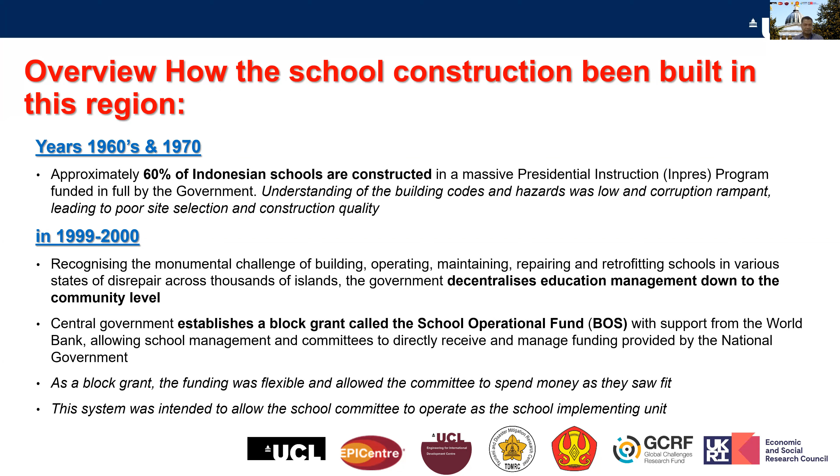Who's the committee? The committee is a group of people who have a connection with the school, like the parents of students and people around the school who can join the committee. As a block grant, the funding was flexible and allowed the committee to spend money as they saw fit. The system was intended to allow the school committee to operate as the school's implementing unit. Okay, next slide.

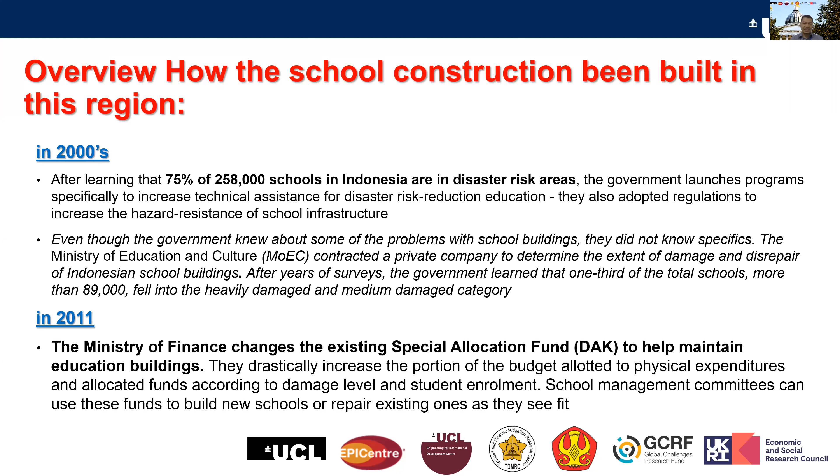In 2011, the Ministry of Finance changed the existing Special Allocation Fund, cited as DAK, to help maintain education buildings. They drastically increased the portion of the budget allotted to physical expenditure and allocated funds according to damage level and student enrollment. School management committees can use this fund to build a school or repair an existing one as they see fit.

How critical thinking of the school construction process in Indonesia from the technical capacity and construction management perspective: for construction, the responsibility is now with the school management committees. They had to hire their own contractors and subcontractors to help them build or retrofit schools, so the contractors and subcontractors are not connected with the government anymore.

But in practice, at the local level, subcontractors are usually proposed by the local government. Committees do receive some assistance from the Ministry of Education's engineers to oversee a project, but they don't always have the capacity to implement the construction project, nor the appropriate knowledge to prioritize school safety. As a result, DAK funds have been spent returning buildings to their original condition, rather than improving structural components to make them safer. That's what happened in Indonesia.

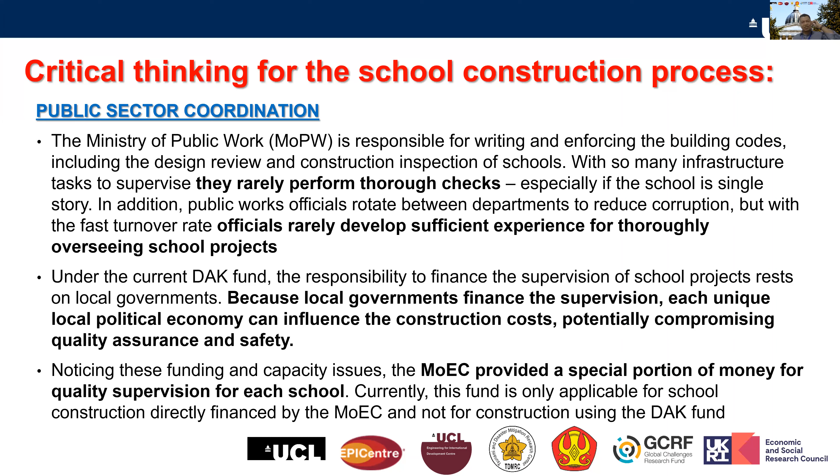Noting these funding and capacity issues, the Ministry of Education provides a special portion of money for quality supervision for each school. Currently, this fund is only applicable for school construction directly financed by the Ministry of Education, and not for construction financed through the DAK fund. That's a bit of a difficulty for the committee as well.

Okay, next. The last thing I want to critically examine is construction speed. Yeah, this is a big problem.

To compound this challenge, the speed at which school management committees must spend DAK funds has pressured school committees to implement projects faster than they are capable of. Usually they just have a limited time to build the school and use all of the budget. Even if the time is just 2 or 3 months, they have to spend the budget.

Other departments rely on DAK funds for education material, so schools need to finish their work within just a 3-month funding window so that funding for other sectors will not be delayed. It's very strict; if they take more than 3 months, the rest of the budget goes back to the government. That's the problem: they have to finish and construct the building very fast, without much concern about quality or structural safety.

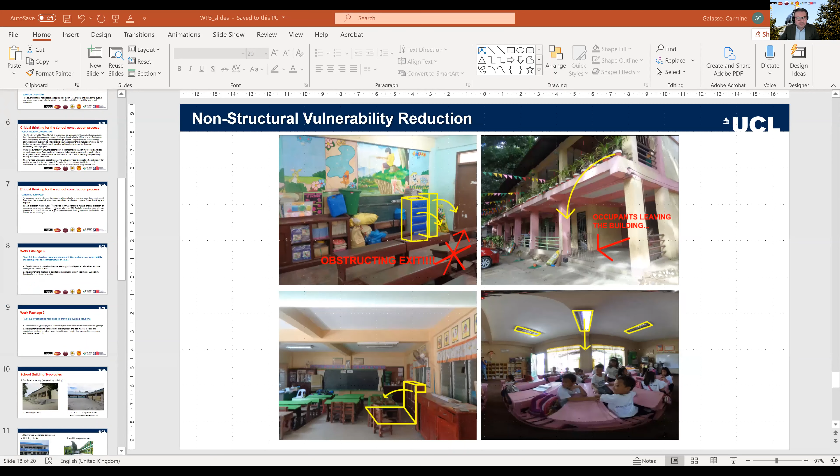Dr. Yunita. Maybe Yunita, I'll share the slides and remove the slides for you. Thank you. Sorry, there's a technical problem.

Thank you, Dr. Sukiman and Dr. Carmine Galasso, for giving me time for a brief explanation about work package 3. There are mainly two tasks: investigating exposure characteristics and physical vulnerability modeling of school infrastructure in Palu, or Central Sulawesi, and then investigating resilience and improving physical solutions, involving assessment of typical vulnerability and vulnerability reduction measures for each structure.

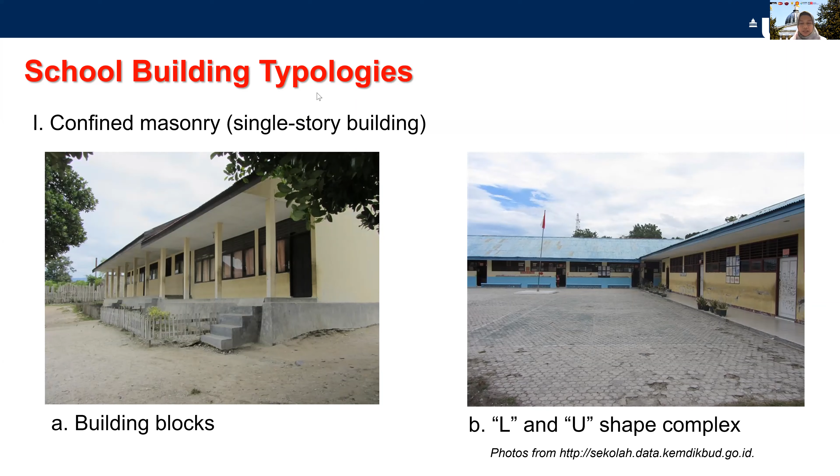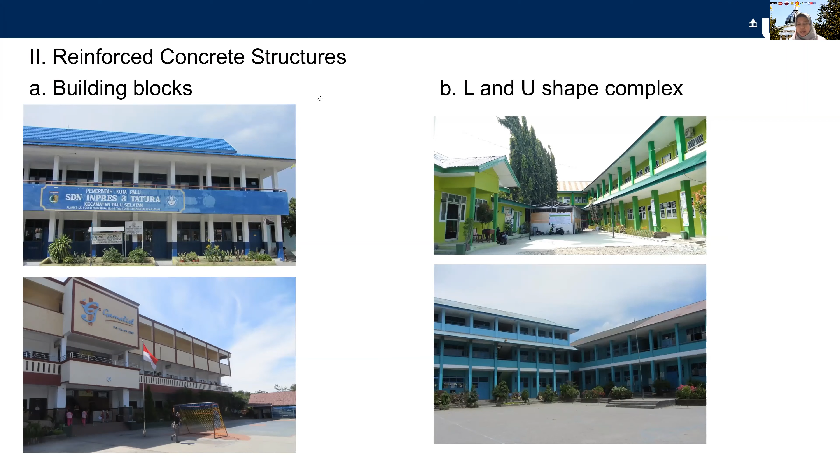To start, we developed the school typology and damage data from the preliminary survey done by TDMRC and EPICentre in 2018. We found two main typologies for school buildings: confined masonry for single-story buildings, and reinforced concrete structures for school buildings with more than a single story.

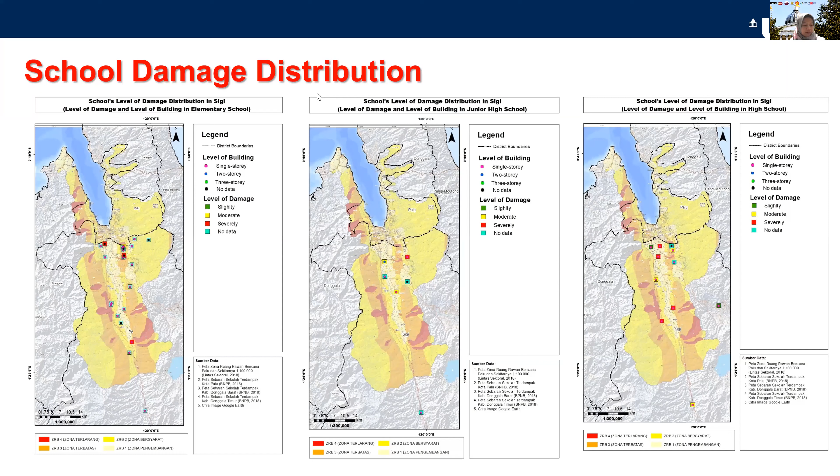We also developed a school distribution map, and we developed the school typology and damage distribution. For every location, we have three different maps for school damage distribution: elementary school, junior high school, and senior high school. The map of school damage includes information on the building's number of stories and the level of damage.

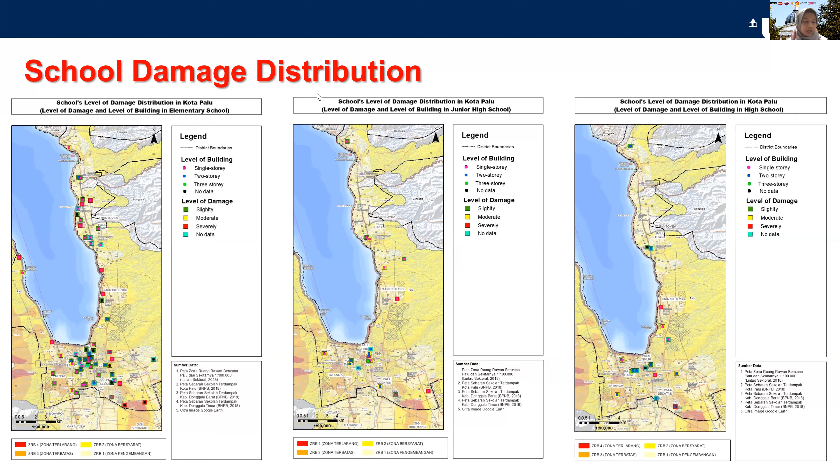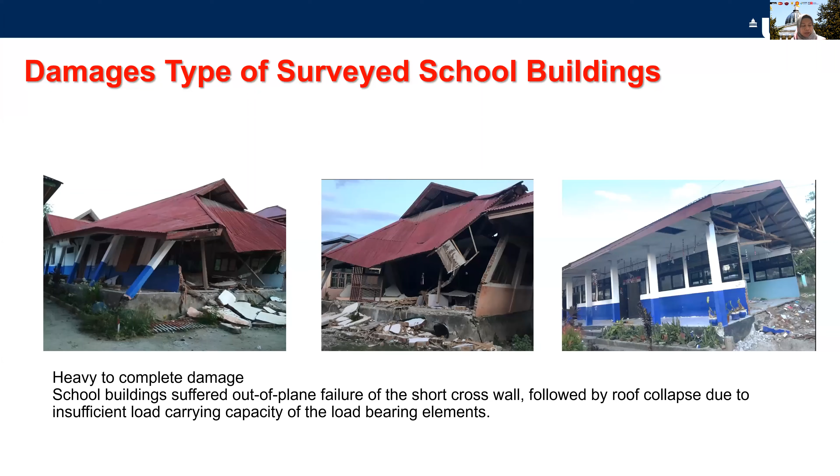Most of the data was taken from BNPB and from the preliminary survey. We also identified the typical damage of each type of construction, which can be concluded as out-of-plane failure of confined masonry structures causing decreasing capacity of the wall to carry load, followed by roof collapse, and also in-plane failure causing cracks going through the spandrel and tied columns.

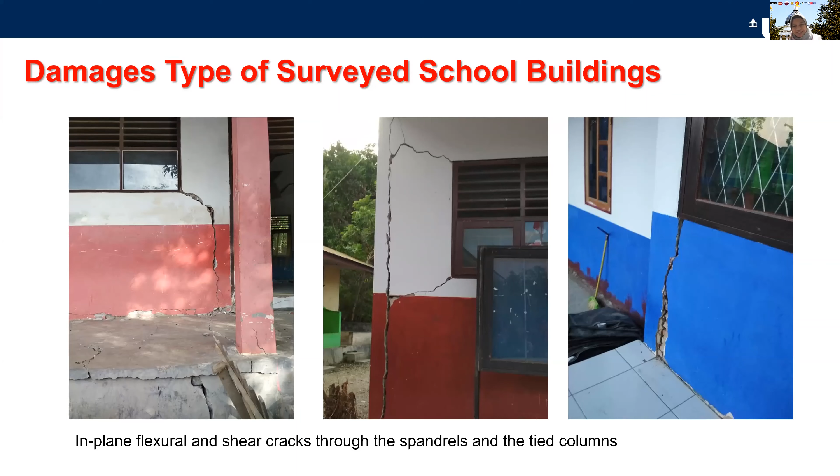However, the data is insufficient to characterize the damage that could happen in a multi-hazard scenario, so further analysis and investigation is really important. That's why we include that in the activities of work package 3. Further explanation of the aim and activities of work package 3 will be presented by Dr. Carmine Galasso.

Thanks a lot, Yunita. As Yunita just said, empirical data are not enough to build reliable vulnerability models for school buildings in Palu. So what we plan to do, together with Yunita, Tiziana, and our collaborators, is develop a multi-level framework, successfully built on a previous project with TDMRC and Inspire, funded by the British Council. The idea is to start with a rapid visual survey through a mobile app we developed within the previous project, together with local partners in Indonesia.

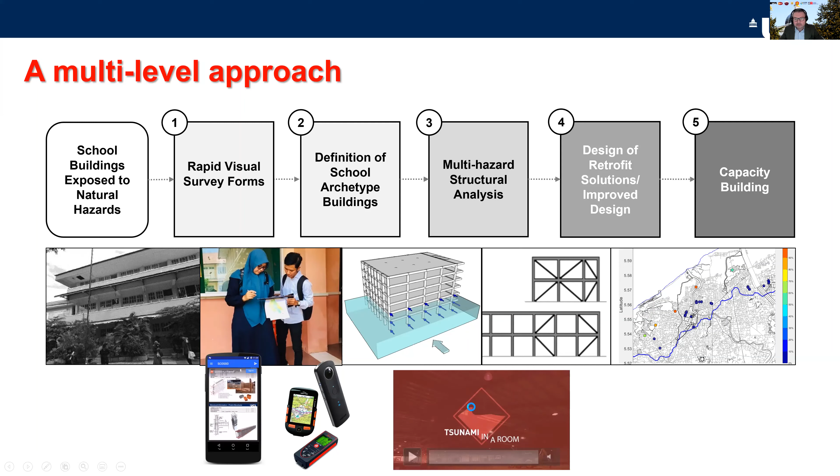Based on the results from the rapid visual survey, we can define an archetype school building for which we conduct advanced nonlinear analysis for multiple hazards, and based on that, provide recommendations in terms of retrofit of those schools, but also in terms of improved design and build-back-better for future schools. A key component of this work package is capacity building with local partners.

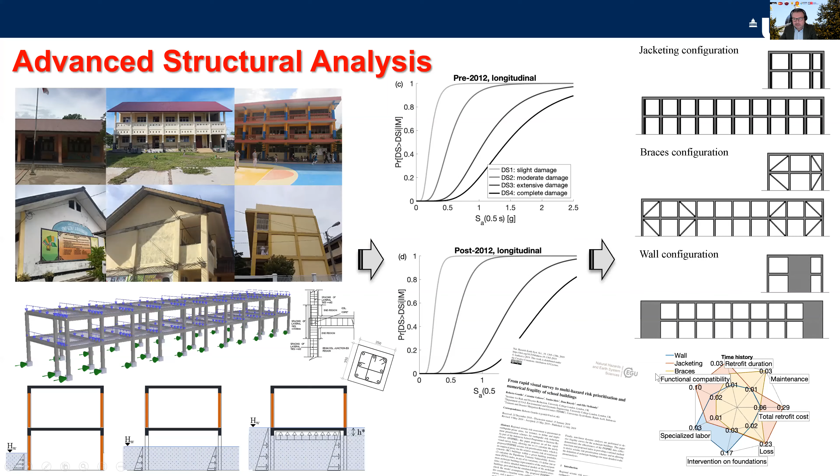We will develop some very advanced numerical tools, some developed at UCL by Tiziana and her collaborators within previous projects, which are state-of-the-art approaches for tsunami modeling and vulnerability modeling of buildings. We'll use fragility and vulnerability type models to recommend different retrofit alternatives, and also use multi-criteria decision making to look at different criteria and identify the best performing alternative.

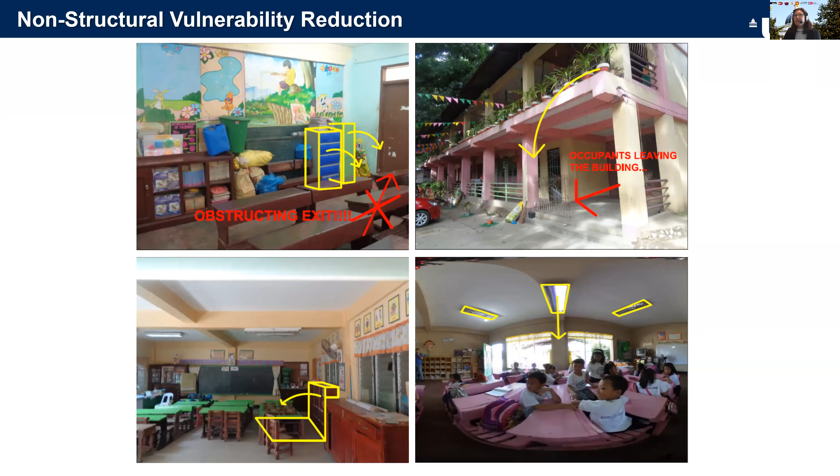Beyond just interventions on physical structures, which can sometimes be expensive, we also know there is significant risk to life from non-structural elements, such as falling objects. So we'll holistically look at these as part of the intervention recommendations we'll be conducting.

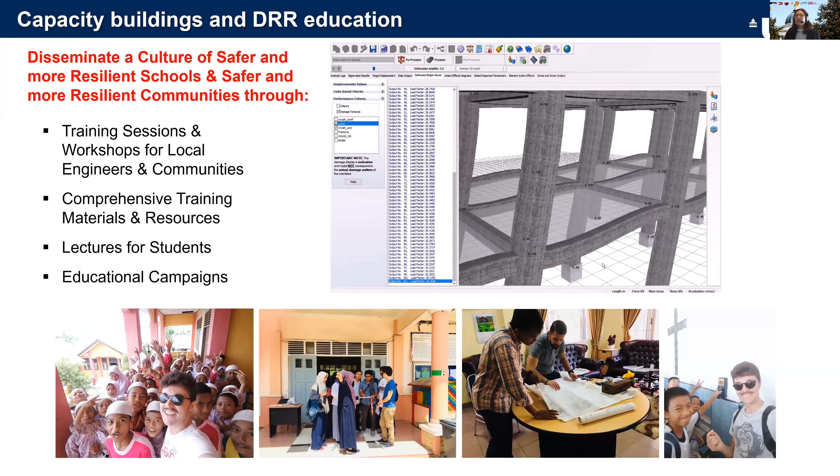We have a long history of working in different communities, providing training on different aspects of physical vulnerability, from surveying buildings to conducting analyses. So we are going to provide training sessions and workshops for local engineers and communities, and integrate some of our approaches, techniques, and knowledge, hopefully into educational campaigns integrated within school curricula.